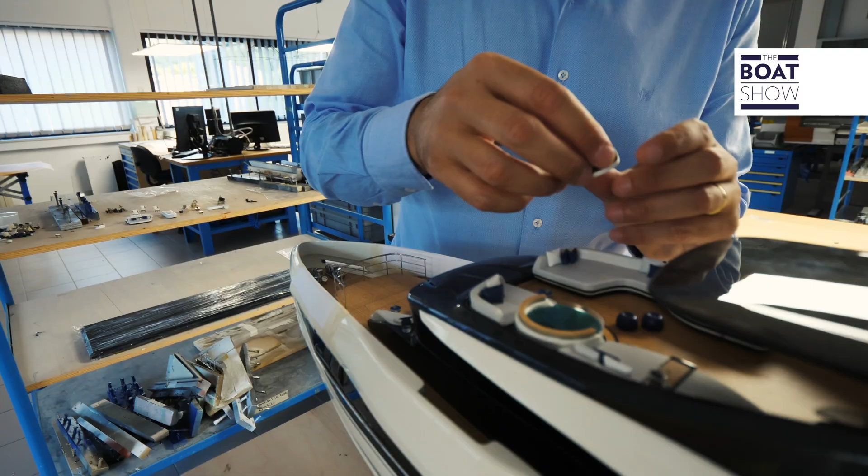Until a few years earlier, model boats or ships were just sets of volumes. As the precision of construction and the refinement of techniques and finishes evolved, those objects aroused in anyone who looked at them that suggestion as important in the marketplace as in life: emotion.

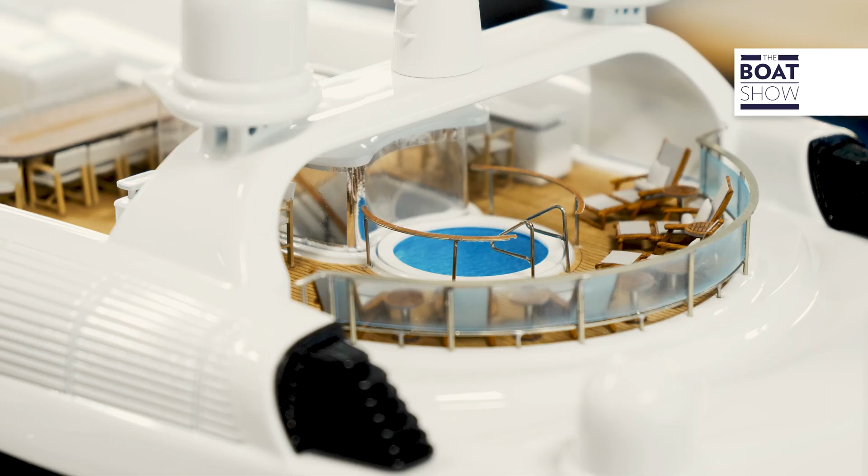The craftsmanship that Giuseppe learned as a boy from the shipwrights he was sent to by his father in the summer remains to this day the basis for all the technological development of this wonderful company.

From the first completely handmade model to today, things have changed, and by a lot. Giuseppe and Elisabetta moved to Itri, where they expanded Model Maker Group with two sheds, in which, thanks to their strong synergy, they gave life to real jewels.

And so we understood that these are really some great little boats, and as the real ones, everything starts from the project.

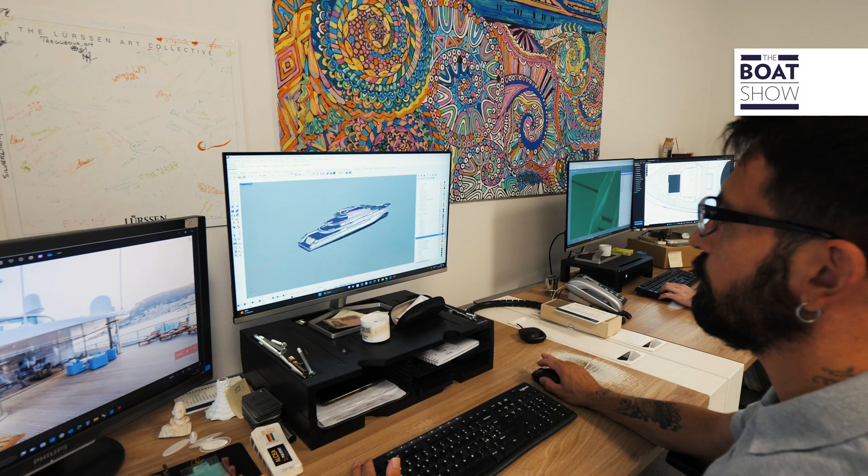At the engineering department, they study all the mathematics of the boats to be made and all the details that you want to represent in a model. An exploded view drawing of all the blocks is created for the production areas: milling, 3D printing, and furniture preparation.

Then again, the base, the case, and the packaging. You prepare the bill of materials with the specific needs and start the job order that officially launches the model into production.

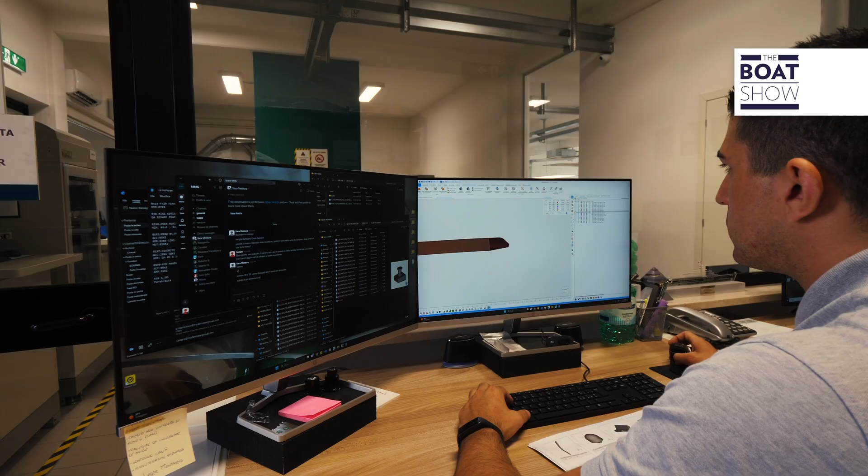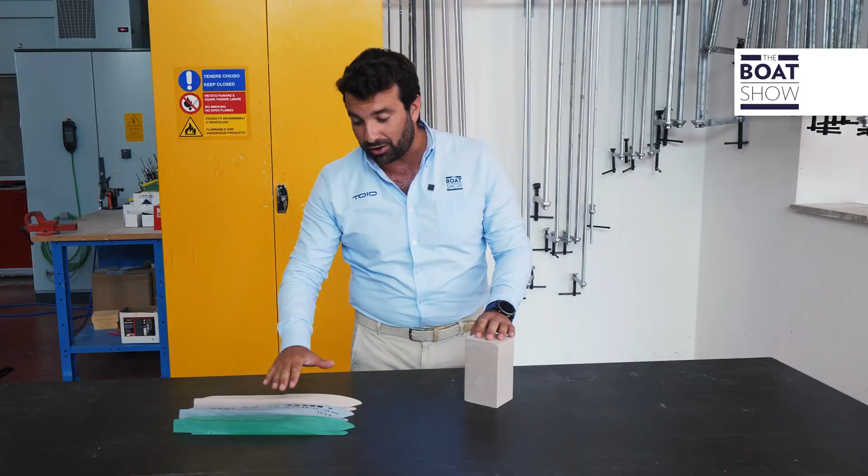As a first step, the hull and deck must be milled with a 5-axis milling machine that initially goes through a block of Ureol, which is a polyurethane foam resin of varying density, depending on the shape requirements of the workpiece.

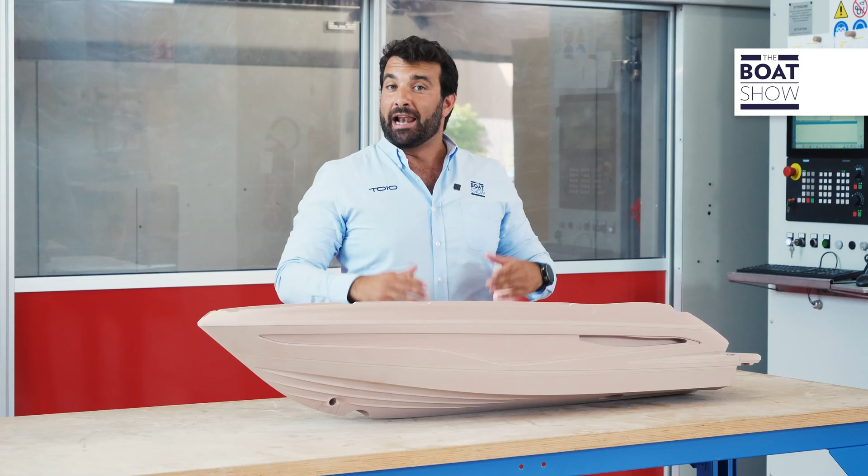In a second step, it then goes to fine milling, which defines the lines and shapes. The average size of the models created by Model Maker Group is 1 metre, and the processing time for this stage alone is 10 to 12 hours.

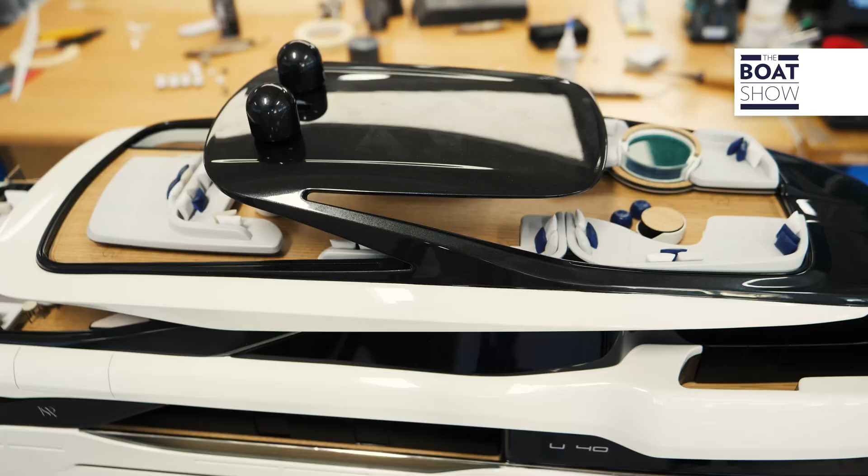At the same time, in 3D printing, all auxiliary accessories, such as satellite antennas, roll bars and superstructures, furniture accessories and swimming pools are made. This process is developed through two different techniques. In the first, polymerization of the liquid resin occurs through catalyzation induced by UV laser light.

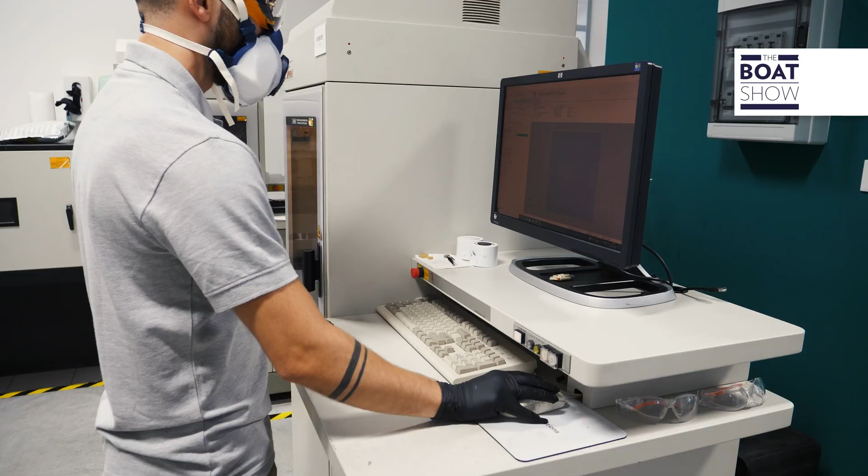Once the process ended, the finished parts must be cleaned and placed in an oven to complete the curing process.

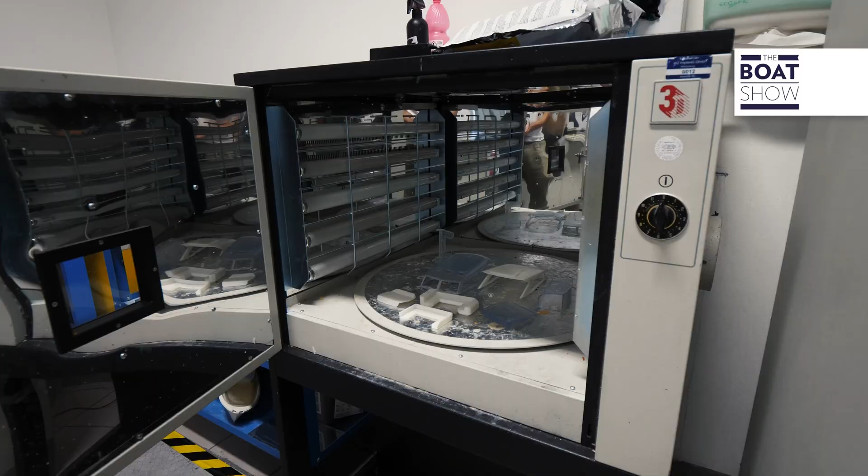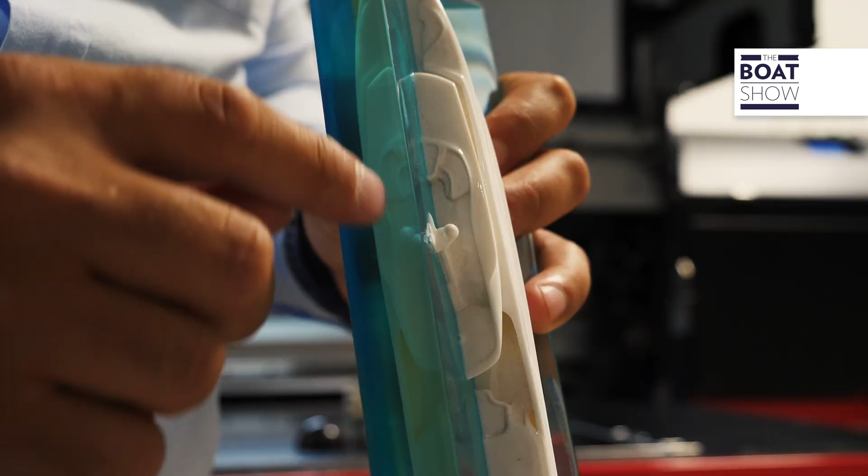In the second case, printing is still done by means of a liquid resin, but this time a pigmented one, from which pieces that are permanently transparent or partly coloured can be created, opening up endless possibilities for combinations of shade and form. This is a unique piece.

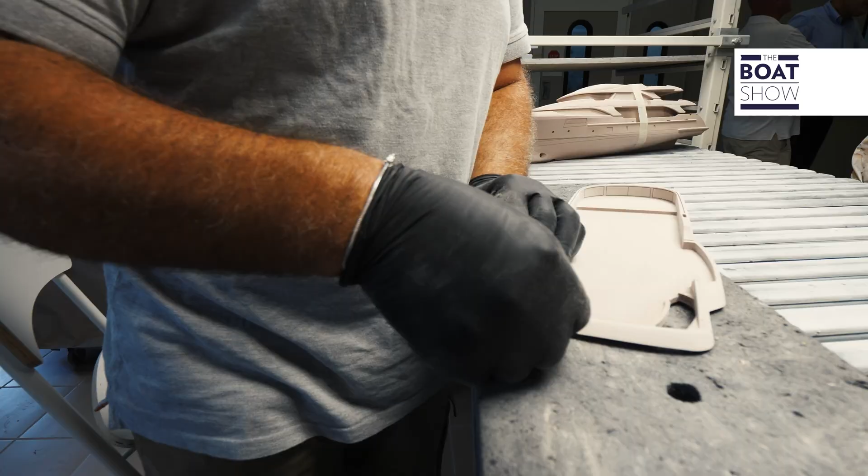Meanwhile, the hulls have come out of milling, have been sanded strictly by hand, and are now ready for the painting phase.

This is a very important process because several shipyards use it as an internal test of the colour plan, rather than for final customer approval. In short, it is easier to repaint a model than an entire hull.

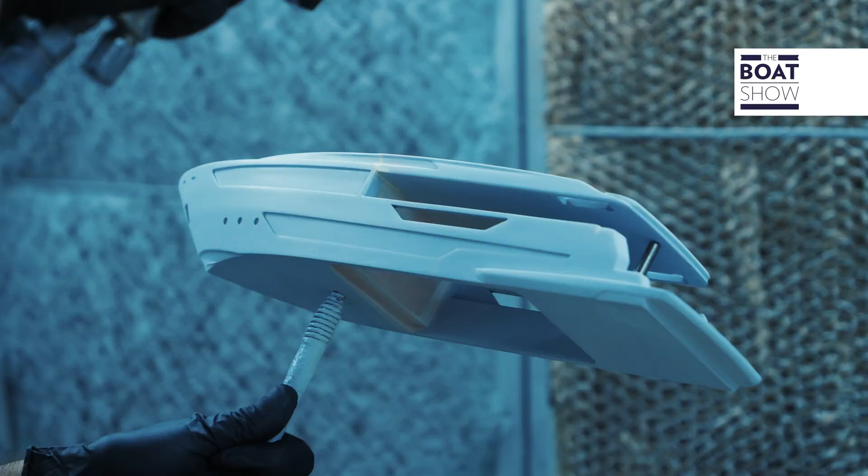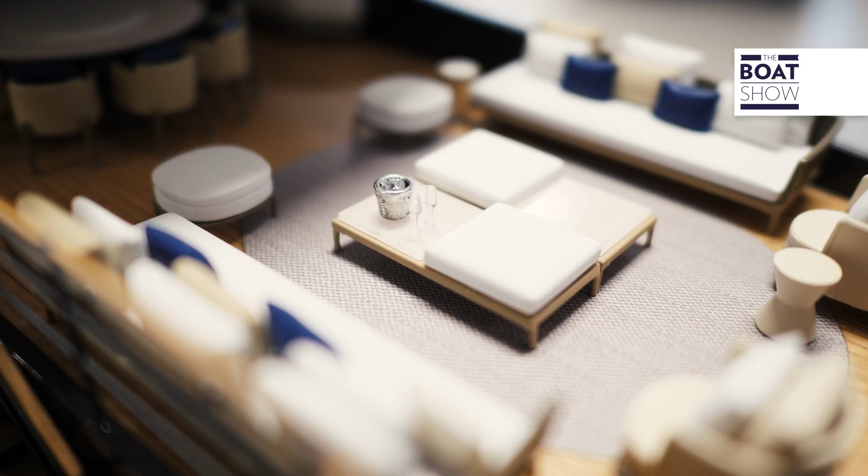The job order has been worked out, and for this model we need bollards, propellers, mooring winches, as well as all the fittings, including plants. All parts that, in a normal shipyard, would be ordered from suppliers, but instead are all produced in-house here.

Yeah, where else would you get a glass and bottle of champagne like that? Cheers! Ah, can you see it? Sorry, it's tiny.

While the printed parts are stocked, ready to be set up, the metal parts are machined to arrive at the colour, texture and effect you need through sophisticated tumbling, sandblasting and galvanic treatments.

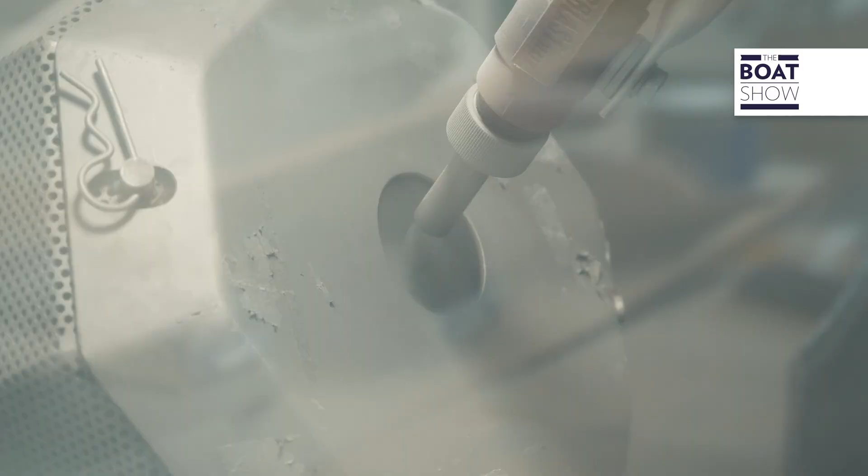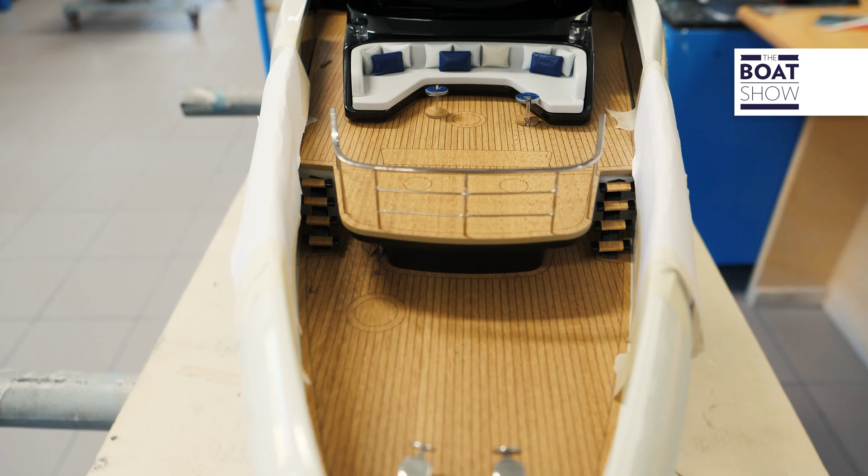On yachts of this level, the choice of materials is critical, and so is being able to reproduce the same perception as on board in the model. Marble, wood, precious metals such as gold and the finest steels. They are all the result of a maniacal search for product perfection that Model Maker Group has been pursuing for more than 20 years.

The pieces are ready and in assembly. Painstaking hands compose with absolute precision what eventually takes shape as if by magic. Volumes are characterized, lines come together, and inside the model finally seems to come to life.

The whole process can take up to several months. While it may seem like a seemingly simple job so far, in reality, all the electronics, automation and handling can go into complicating the entire project exponentially.

For Model Maker Group, in reality, anything is possible. Just being able to think about it is enough, then realizing it is a different kettle of fish.

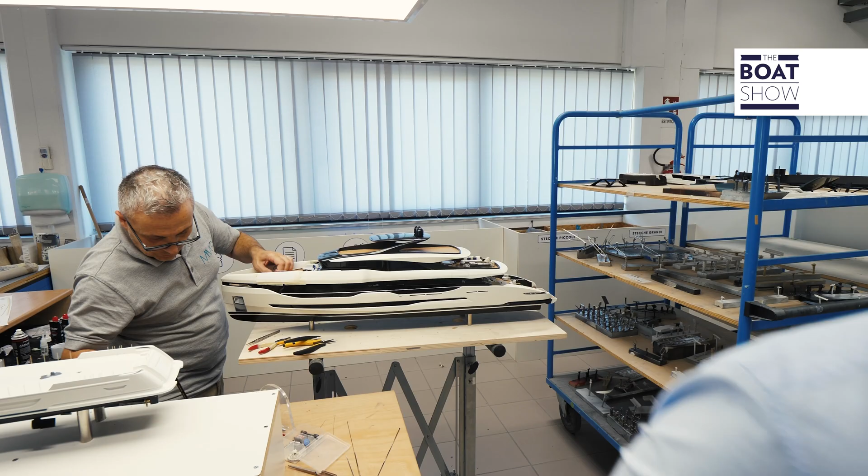Not least because you have to think that these models, even the largest ones, will have to go around the world, and therefore will have to be disassembled, shipped and reassembled, never being able to afford to break down or fall.

That's right, because some of these models are precisely used by shipyards to show their customers the majesty of their vessels. They are representative models that can become gifts just for the owners themselves.

First and foremost, we understood that the model is a work of art. Art is emotion. And this is the most romantic purpose that can be attributed to this object.

Like a beautiful family photo on the desk, the model accompanies the ship owner in the memory of the boats of his life, everywhere and, most importantly, forever.